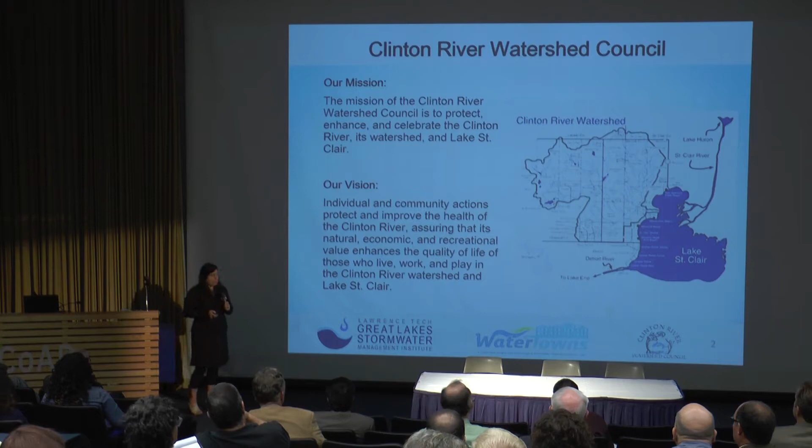So Water Towns is based on the idea that we have all of these assets in the Clinton River watershed and the Lake St. Clair watershed that are really being underutilized. Historically, we've not developed our water resources to the potential that exists for community and economic development. Some of that has been due to environmental degradation, and some has just been due to poor land use planning and poor community development choices.

But we see a huge opportunity for developing areas along our waterways where people can actually engage with them—go to the water, enjoy what's there, and have that be a part of your quality of life. So what we've done is initiated this program called Water Towns, which is really targeting the towns, the actual places within our watershed, to try to find out what's unique and valuable about each of these places.

We work with those local communities, whether it's civic groups, local DDAs, or the cities themselves, strategizing how we can look at specific areas in your community that are underutilized and could be more of a community asset than they currently are, and by that token raise awareness and make sure people are on board for all of these other more serious environmental considerations we've been talking about today.

So this is just a map that shows what we're calling our water hubs, and these are the areas that we focus our actions on. We've identified a really long laundry list of areas along the river, all the way up from the northern part of Independence Township, through Oakland County, out into Macomb County, and even into Lake St. Clair.

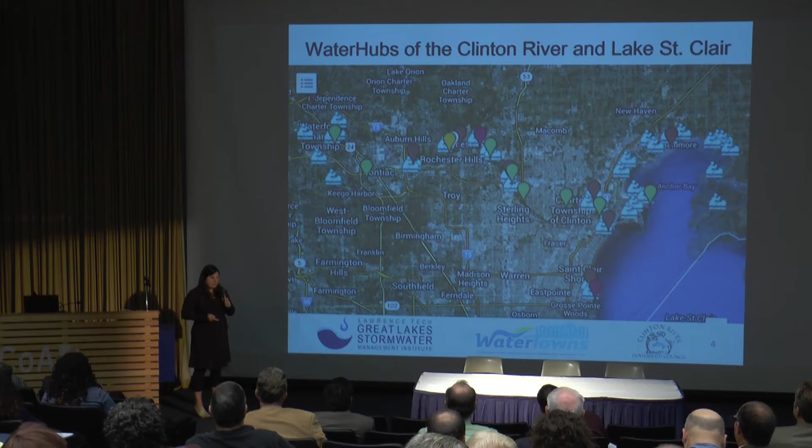So these are areas where we really think that there's a lot of potential, and we're all about trying to realize that potential and make that happen. So one of the ways that we're doing that is by working with Don Carpenter and Rachel Pleshak, who have been great to work with.

What we did originally was we went to some of these communities and did broader visioning around the waterways, identifying concept plans for what's possible, what could be implemented in the short term, and what could be implemented in the long term. In a lot of these areas, improving our green infrastructure came up again and again. So with the help of the URB funding, we were able to work with Don Carpenter and Rachel to take that a step further in some of these communities and come up with really detailed concept plans and cost estimates that can hopefully help move us forward, so that when grant opportunities and other funding come up, we're ready to go and know what we want to do.

The goals of our project are these conceptual site plans showing the specific green infrastructure practices applied to some of these areas, which you'll see in much more detail later in the presentation. Some really artistic renderings kind of get people excited and help them visualize, because when you start talking about bioswales and rain gardens, people don't necessarily know what that means, and if they do, they may have trouble visualizing how it fits into the context of the specific area. So this really helps people understand, in areas they're familiar with, what this stuff looks like and how it could benefit the community.

The stormwater volume reduction estimates are important from the perspective of showing the environmental benefit. It's not something that's necessarily easy to understand for local officials, but if we can quantify that and show the value, and hopefully equate that into economic benefits, we think there's a value there.

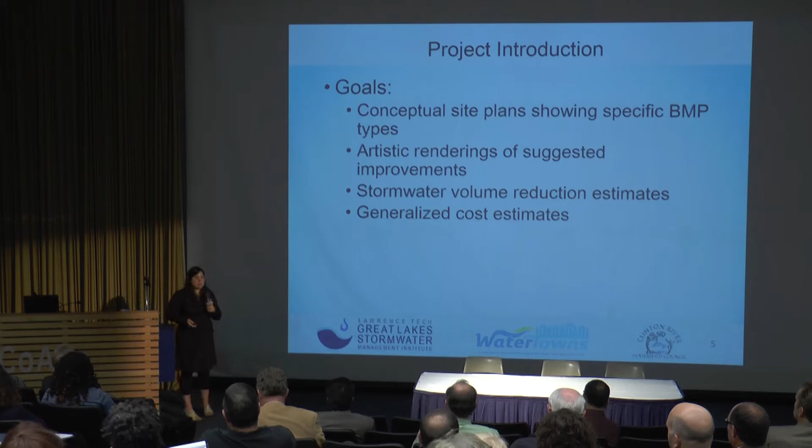So the three communities that we're working with, and we're hoping to continue this and work with more, are Clarkston and Rochester, both in Oakland County, and Clinton Township. We're working with these communities on a variety of initiatives to try to advance this water towns idea. But these are some really unique communities with some really different challenges. Clinton Township being much more suburban, downtown Rochester and downtown Clarkston having much more of an urban feel, so there's different issues that we're dealing with. So we're really excited about the project.

I'm so excited about the products that we've seen thus far, and I know the community leaders we've been working with are also very excited. Township engineers, city managers, they're going to be able to use this information to actually make these things happen and get these things built on the ground.

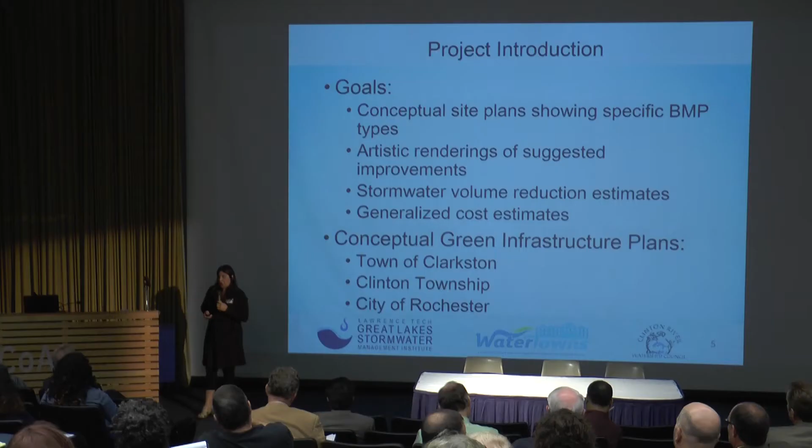One of the best parts about being a faculty member is you get to stand up here and take credit for the hard work of your students, right? Unfortunately, I have a little bit too much ethics for that. So what you're going to see is 90% Rachel's work, okay? So this is a lot of this.

The question is, well, if it's Rachel's work, why am I up here at all? So I gave Rachel the opportunity. I said, hey Rachel, why don't you present your work? And she said, I don't think I really want to do that. So what we're going to do is shoot for next year. Next year, the goal is to have Rachel standing up here talking about Rachel's work.

To go into a little bit more detail, what we did was put together a process for addressing these goals. We started by visiting with each community, talking with them, trying to understand their vision, what they wanted to accomplish, where they were.

We downloaded existing or retrieved existing GIS databases, infrastructure, what kind of pipe networks they already had in place. We came up with conceptual site plans and preliminary stormwater estimates, went back to the community and said, here's what we're thinking, what do you think?

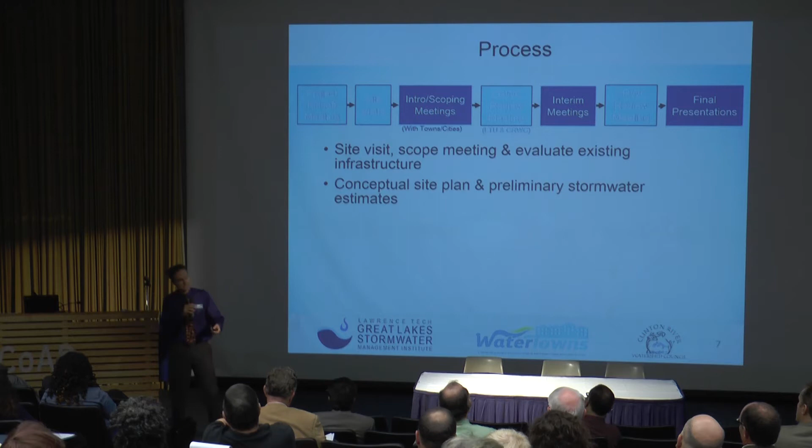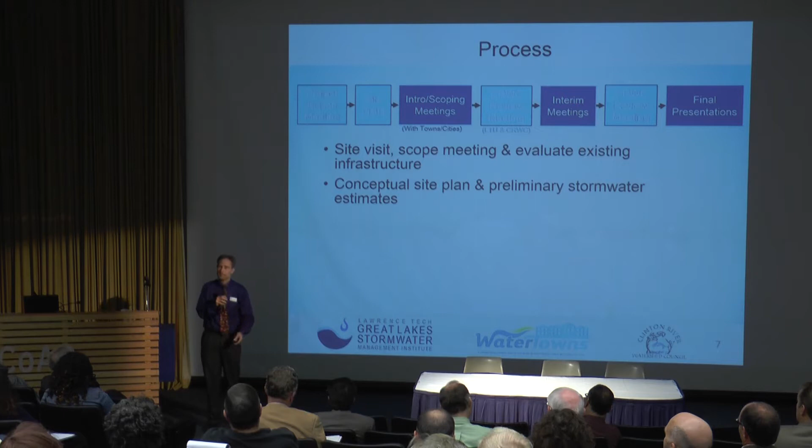That led us to eliminate some things. They said, well, that's okay, but we really want to preserve that for flag football, so let's take that out. Or, well, you know, that gentleman doesn't really play nice with others, so we should probably leave his parking lot out of the plan. So it was that back and forth process.

That was the internal deliverable check. So finally, we have final site plans and stormwater calculations associated with this. The way we did the stormwater calculations is with the SCS curve number method. I'm not going to bore you with all the details, but there was a process for looking at volumetric runoff from low impact development using an industry standard.

The cost estimations, Nina mentioned that briefly. What we did is we started using WERF, the Water Environment Research Foundation. They have an LID whole life cycle cost models tool that we used for these cost estimates. The thing that's great about that tool, for those of you who aren't familiar with it, is you can start off by putting in just industry standards. And as you refine your ideas, it allows you to start substituting out.

So once you know you're going to use raised beds in your community gardens, you can start figuring out exact costs and things of that nature. We also used the Michigan LID manual and RS Means, and then a few local sources in terms of some of the cost estimates. When you see the numbers on the cost, I do want to point out two other things.

One is we assumed 100% external contractor installations, meaning that if a municipality had some people in their grounds crew that could do some of this stuff, or volunteer organizations, that cost would come down. The other thing we did is we assumed everything on the high end, high end for all these suppliers, high end for everything. That way what you're seeing is an overestimate of the cost based on best factors.

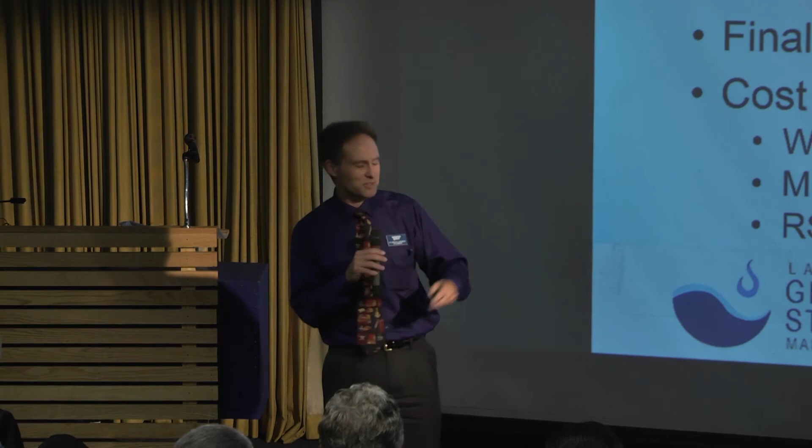We figured we'd rather shoot high than, well anyway. Basically, we figured we'd shoot high, and that way they'll be pleasantly surprised when it comes time for reality, right? So we're being honest about that as well.

So one of the things we talked about is, well, how do you convey this to people? One of the things we did is we looked at a 2-year, 24-hour storm. I know that's not a flood event, but that's the typical event you're looking at for green infrastructure. So we said, let's focus on that water quality event, let's see what we can do to capture the typical storm that happens once every 2 years.

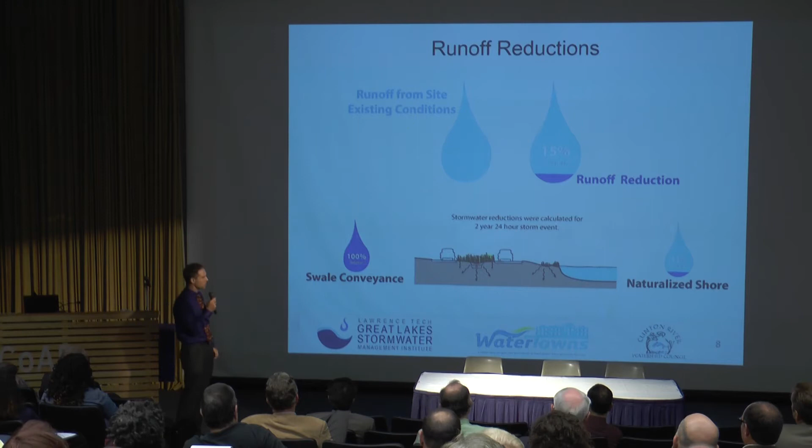You'll see this over and over again. This represents existing runoff, what's there right now. After we do GI, this would represent the reduction. So a 15% reduction would be like that. If you see a big purple dot like that, that's 100% reduction of runoff on the 2-year, 24-hour storm. We need to start with the baseline. Naturalized shoreline would be like 15%. So you're going to see that symbol over and over again.

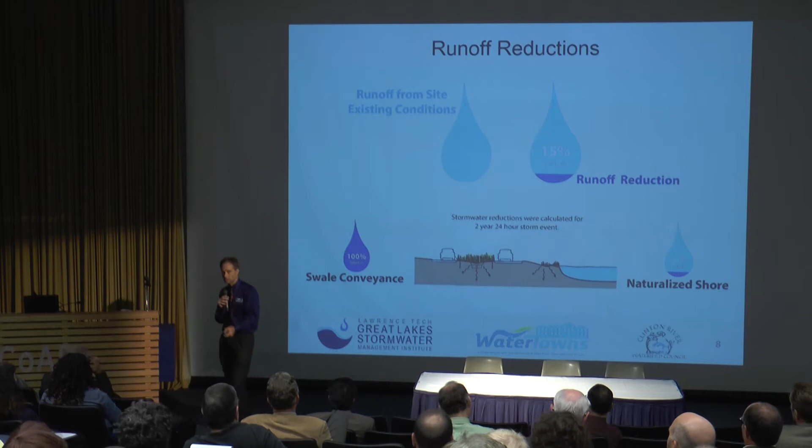So I'm going to start walking through this a little faster, but I wanted you to understand where these numbers come from as you're trying to digest the images. So let's start with the Village of Clarkston.

So here we are in beautiful downtown Clarkston. Okay, so here's our site. This is all downtown Clarkston right here. We faded out where we weren't looking.

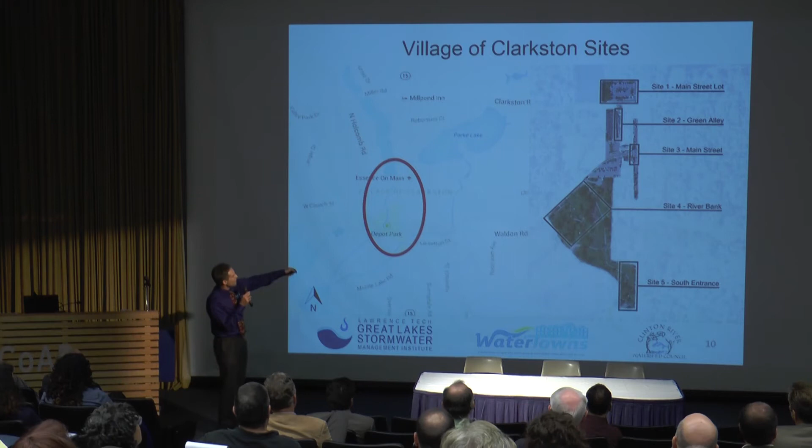We have basically 5 sites going through right downtown Clarkston. Here's Main Street — Kid Rock's favorite restaurant's right about there, so anyone who watches Diners, Drive-Ins, and Dives has been there. We looked at a series of sites stringing through the downtown, up and down Main Street.

I'm not going to go through every slide in as much detail as this one, but I want to show you what you're trying to look at, what you're trying to orient your eye to. So the way this parking lot is paved right now, this is a stall, and this is a stall. Nobody can park here. You have a corner of asphalt that's obviously not draining properly, that doesn't get used by anyone for anything.

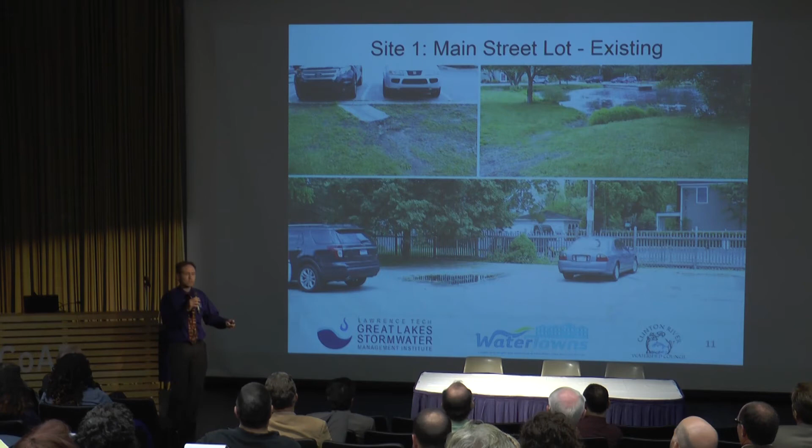Perfect opportunity for green infrastructure. So Nina and Rachel and myself basically walked the streets and tried to identify places with low-hanging fruit retrofits. If I offend anyone from any of these municipalities along the way, I apologize, but sometimes it just takes a fresh set of eyes to look at something.

They are mowing to the lake. Clarkston DPW right now — their tires from their tractors are literally getting into the mill pond. So maybe we need to educate on how not to mow all the way to the edge of the water line, right? You can see there's obviously erosion because you have too much water coming off of that.

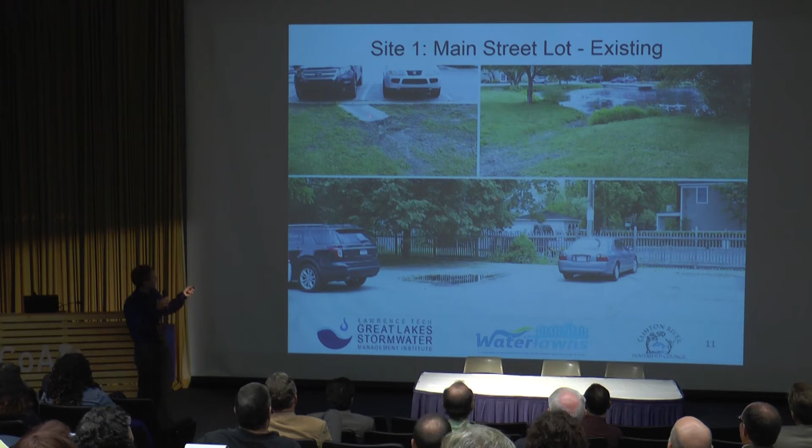So what did we do with this one right here? Well, we recommend a buffer zone — a riparian buffer zone, a lot of green space. You don't see it from this particular angle, but we also included a place for people to access the water. There's still a park bench there, still a place where people can access the water, but we're not mowing the entire edge of the mill pond. Here's our little rain garden in there.

Bioswale curb cuts, things of that nature. And so every single site, you're going to see a 50% reduction in runoff. So that one little corner that's being used by no one for nothing can give you a 50% reduction in runoff from that parking lot.

And that $5,000 estimate, again, that's a really high estimate — that's based on external contractors removing concrete, removing asphalt. I'd say it's going to come in a lot less than that, but we want to make sure we're setting the stage with this information.

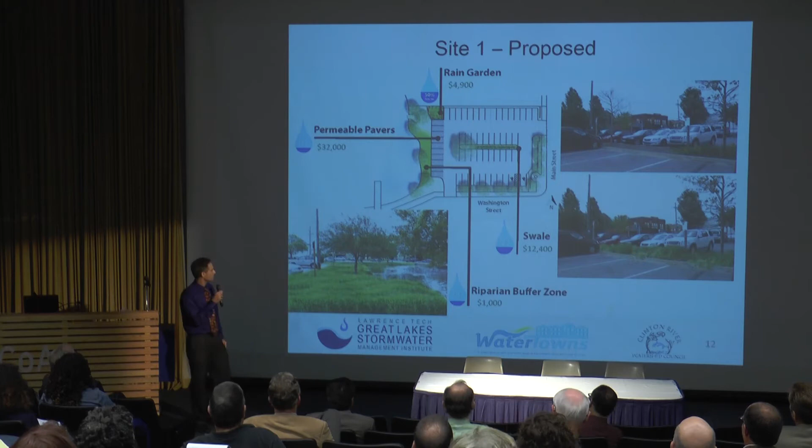Okay, so this is the green alley, I'm going to call it the green alley. This alleyway goes from the parking lot north of Clarkston straight down to the City Hall area and also Depot Park. It actually gets a surprising amount of pedestrian traffic despite it not looking very appealing.

You also have direct-connect storm sewers — the storm sewers off all these buildings direct connect right into the river. So what we looked at doing was modifying that: putting in permeable pavers, putting in planter boxes along the entryways of all the buildings, using different paver types. One of the things we're looking at here is, okay, you still have to have access for the trucks, but we're intentionally segregating off a piece of the walkway for that visual sightline.

This is where the pedestrians go — you're not going to get run over by the delivery trucks, you're going to focus yourself in this area right here. This gives a 100% reduction on the 2-year 24-hour storm, and a significant reduction even on the 10-year storm and the larger storms that are causing flooding.

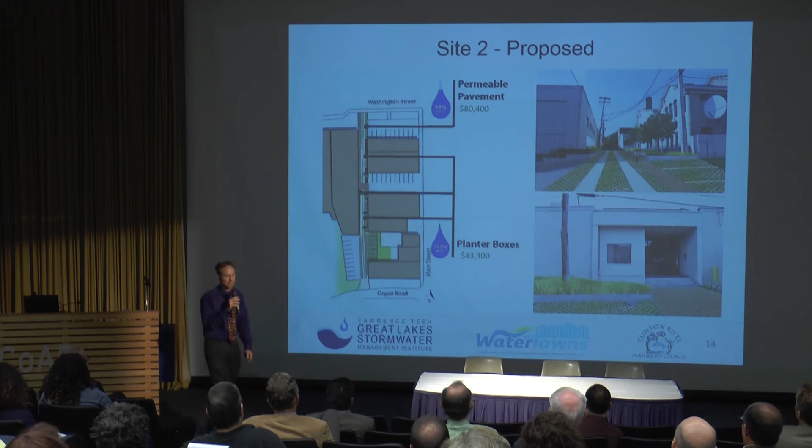One of the things we need to do is reach out to the transportation authorities and say, when a road commission or MDOT is going to redo a road, let's look for opportunities to put in bump outs, traffic calming devices, beautification devices that also serve a significant stormwater improvement function.

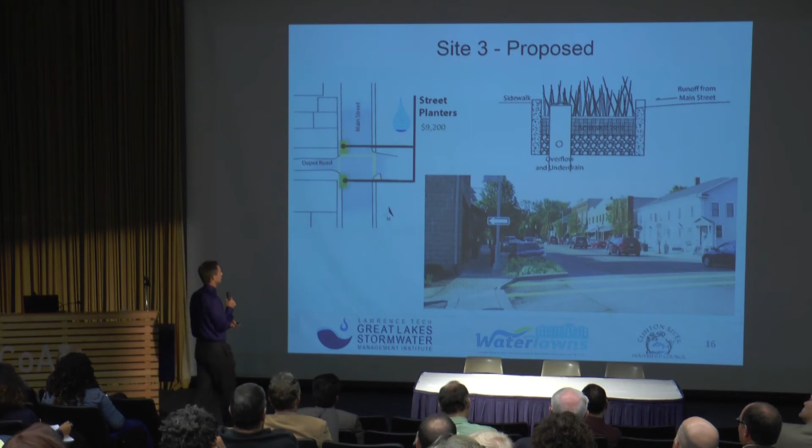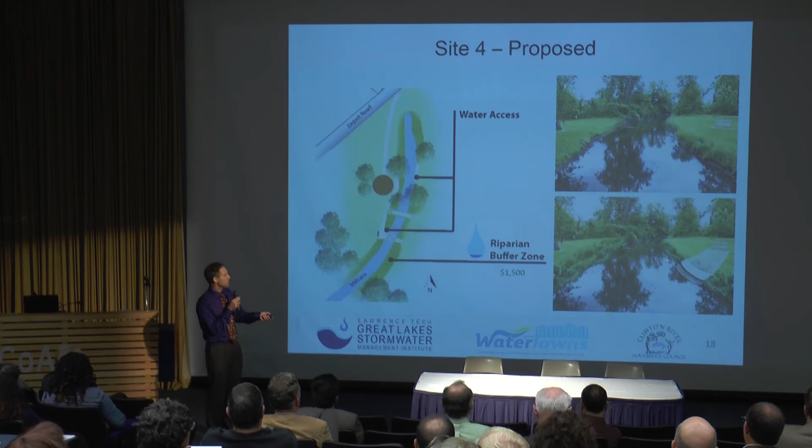What we're talking about is we don't want to cut off pedestrian access to the water. We want students to interact with it and get wet, but we want to focus that in certain locations. If we set aside some rapids with nice flat stones for students to walk across, we can concentrate water access, control erosion, and let other parts be riparian buffer zones. We set aside some areas to green up and clean water quality, and focus attention on other areas. A great example of that is this.

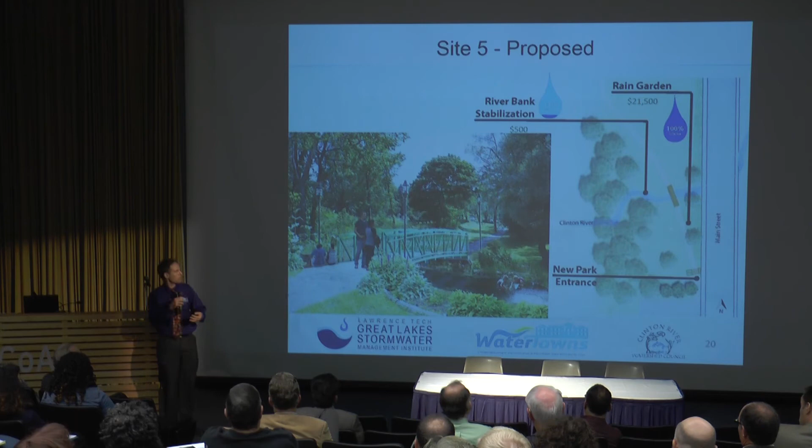In sum, for these 5 sites, there's a lot of impervious area, a lot of downtown area, but we're still looking at about a 50% reduction.

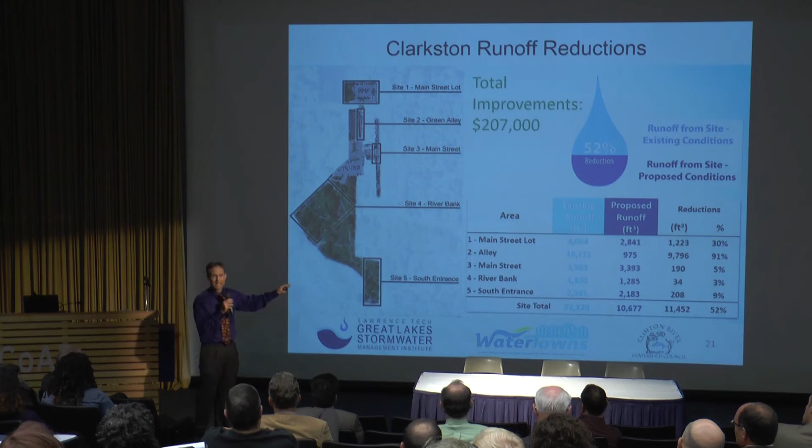Clinton Township has a beautiful fishing pond right there. What we're looking at is naturalizing the shoreline. They've got a beautiful arboretum coming across here, and we're looking at extending this naturalized grove. But basically, Clinton Township has a tremendous amount of mowed turf grass, a huge amount, so we're looking at what we can do to soften up some of those areas.

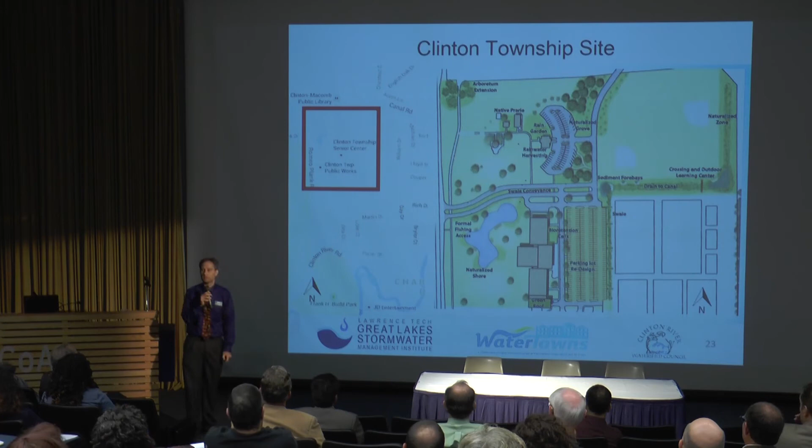One last thing, this is the large roof right here. We actually only put a green roof on this one because the rest of the roofs have more recently been retrofitted and aren't ready to be redone yet. So we recommended putting a green roof on the roof that does need to be redone sooner, rather than just going crazy and putting green roofs on everything.

For turf grass conversions, you can see here they've got this wonderful little village out there. Behind the village is where they do flag football, and in front they have concerts and set up lunch trucks. There's a lot of public interaction and use, so we have to always take into consideration how the public will use this. But there are areas where you could put in native prairies that might even enhance the user's experience.

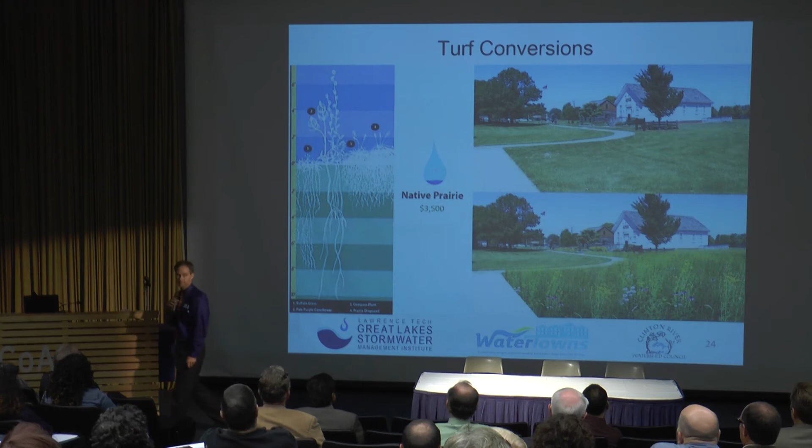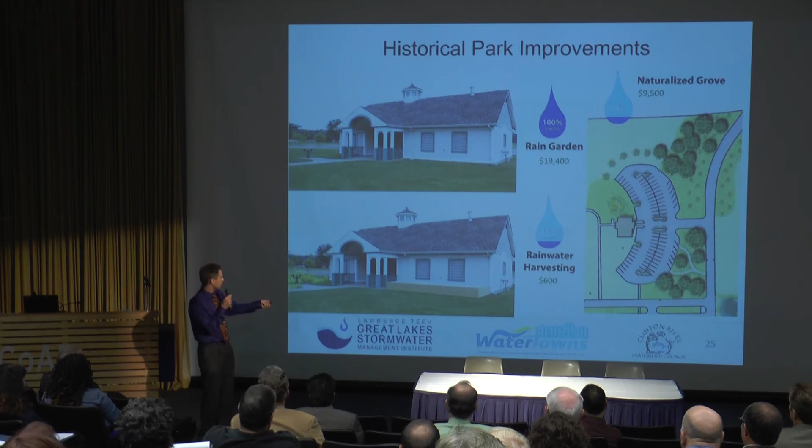For example, this area right here, just off to the right, is where they put up all their farmers markets and festival vendors. But the front of the building isn't being used for anything, and in fact it's really wet right here with really poor drainage. Go figure, it's Clinton Township, right? Flat clay, so very poor drainage. So what we looked at is putting a nice park bench in there that serves as a rainwater harvesting system. For $600, you're capturing quite a bit of water and providing people a place to sit.

Swale conveyance. They've got a very large area here that's about ready to be redone. One of the things I commend all of these communities for doing is being so open-minded. They want to be green, they want to have better places for their community and their people to live in. So they said, well, we know we need to redo this. Instead of redoing it the way it already is, give us an alternative. What can we do instead?

So we're looking at a really nice cut bioswale all the way through here, depressed in the center, good infiltration in the middle, complete capture of the 2-year 24-hour storm, and most capture of the 10-year 24-hour storm. It's basically proven technology. It's pretty high sticker price, but you've got to remember that's also redoing a lot of the road there, curb cuts, underground overflow. There's a lot of engineering that goes into that number.

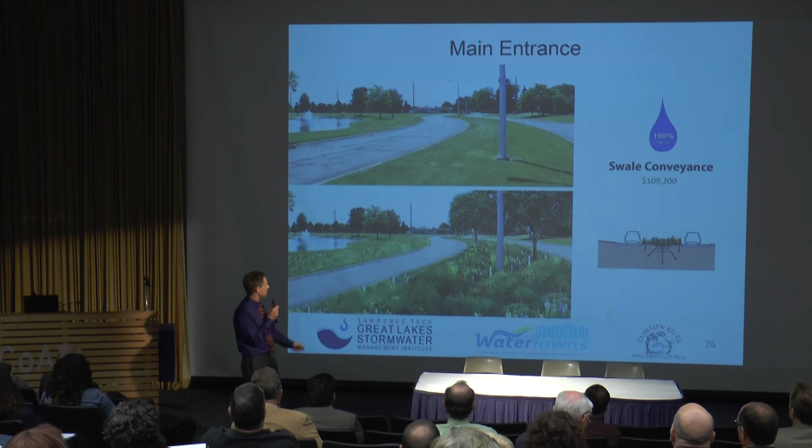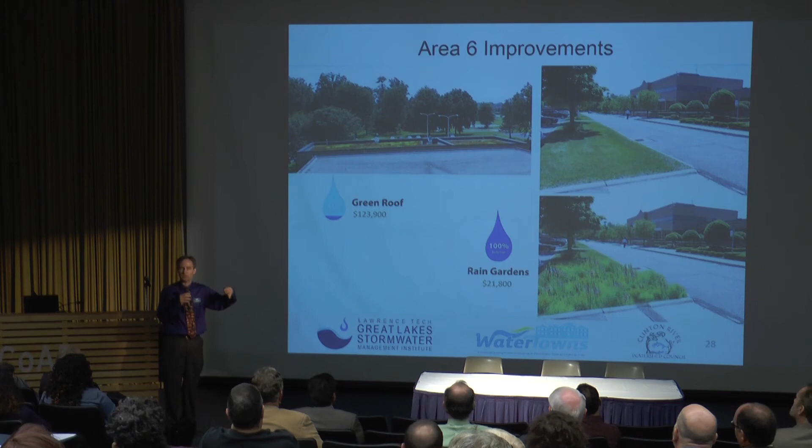So a few others, green roof. When that says a 15% reduction, that's why I brought that up. It's 100% reduction on that roof, but 15% on the entire building, because that portion of the roof is only 15% of all the roof. So it's actually 100% of this part of the roof, 15% of the entire building.

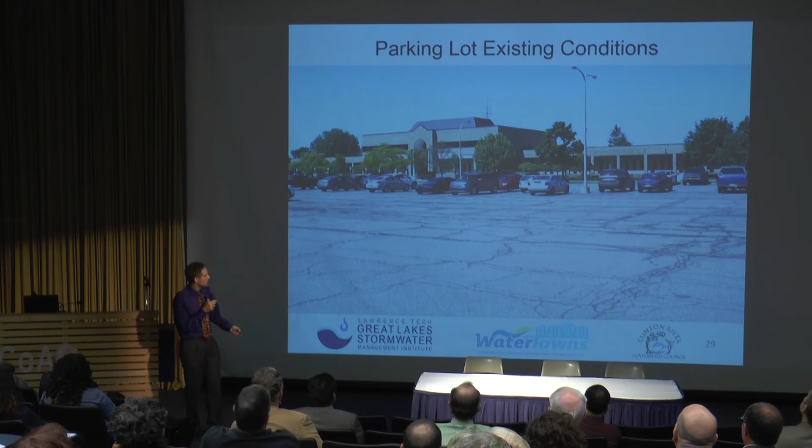Existing parking lot. This has been repaved a couple times, but obviously it's ready to go. So what we said is, let's look at traffic flow patterns. How are people using it? And so we recommended a couple different things to them about restructuring their flow patterns, reducing some of their width.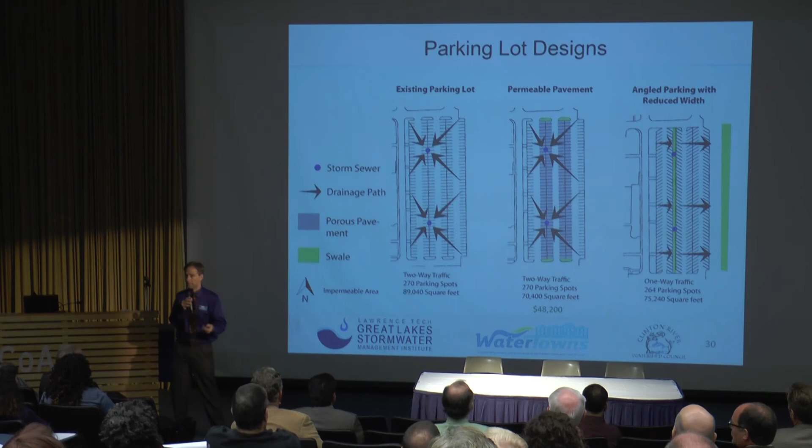Swale improvements along the way. The thing that's interesting about swales is a lot of what we hear about maintenance is, man, those things are a pain in the butt to mow. Maybe we should just stop mowing them.

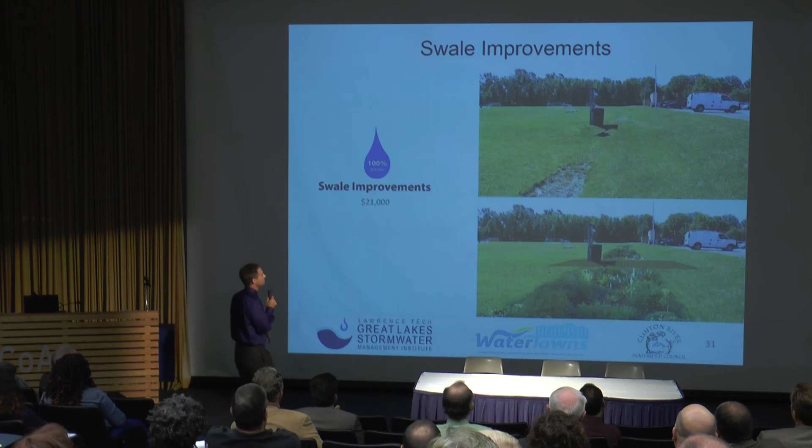So here's about a 32% reduction. One of the reasons that number is a little bit lower is it's a very, very large area. We concentrate our improvements in several key locations, and that number is pretty large a lot because of that, A, the green roof, and B, that entryway.

As Nina mentioned, the thing about this is they get to have all this broken down so they can prioritize. They can go through and say, okay, when we're ready to do a $100,000, $150,000 parking lot, let's look at this instead of this.

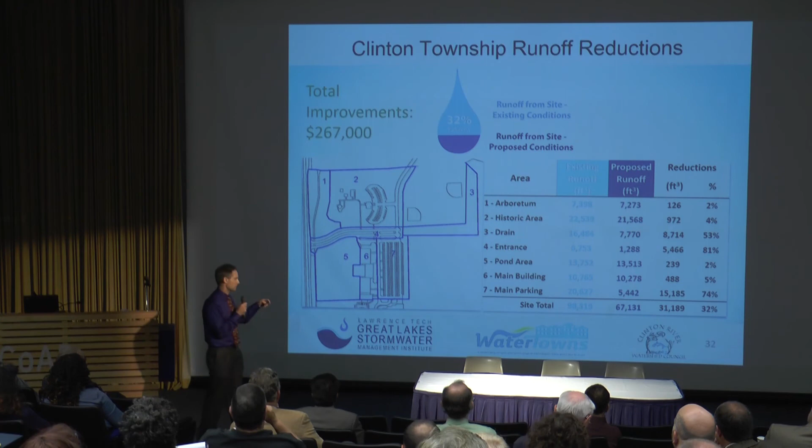City of Rochester has already had a lot of green work done to it. This is the Clinton River right here, and that's the kayak launch there. Many of you are familiar with this.

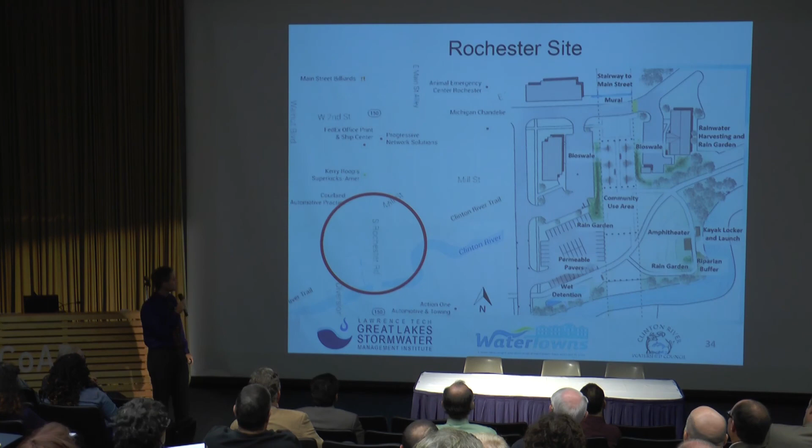So what we're looking at is Rochester Road and the area underneath of Rochester Road, which is an MDOT road as well. We looked at, okay, how can we use that area? This is a building nearby that is going to potentially be retrofit and rehabilitated into another use. So we can put in rain gardens, rainwater harvesting systems, beautification.

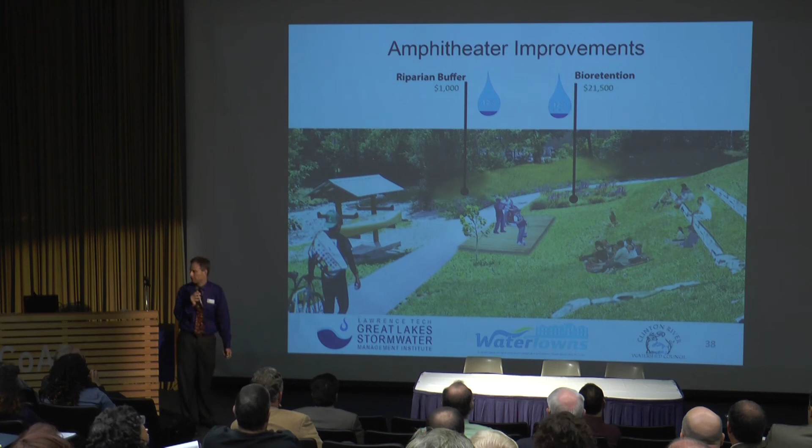So here's the existing amphitheater. I don't know if they call it an amphitheater, but we call it an amphitheater at this point. So let's make it an amphitheater, let's actually get the people engaged, bring in the flagstone.

And then bioretention. Right now what's happening, I'll go back one, is water is just roaring down this pathway and eroding out this part right here. So what we're looking at doing is, can we divert that water off this pathway into some bioretention cells, put in some paving, put in some riparian buffers there, and kind of slow it down.

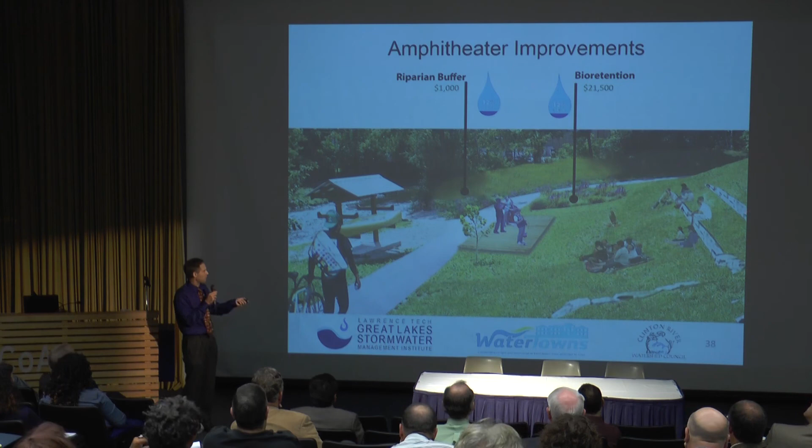So they wanted to provide access to the river, which is exactly what they got, and it's exactly what we need. But one of the unfortunate consequences is you've basically paved an area for the water to go through, causing a lot of erosion. So we're just looking at retrofitting that. Here's underneath the bridge - right now it's kind of an ugly area.

And I apologize if anyone looks at this and thinks it's beautiful, but I'm going to go with ugly. So we have the, sorry.

So what you see here, all this erosion is because water is coming off the bridge deck above, falling straight down and hitting the ground, carrying all of that polluted runoff from the road and fine suspended sediments, clogging up the drainage system downstream.

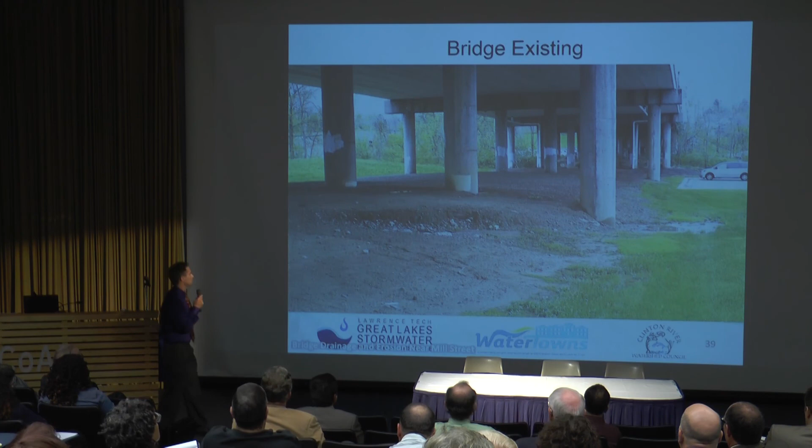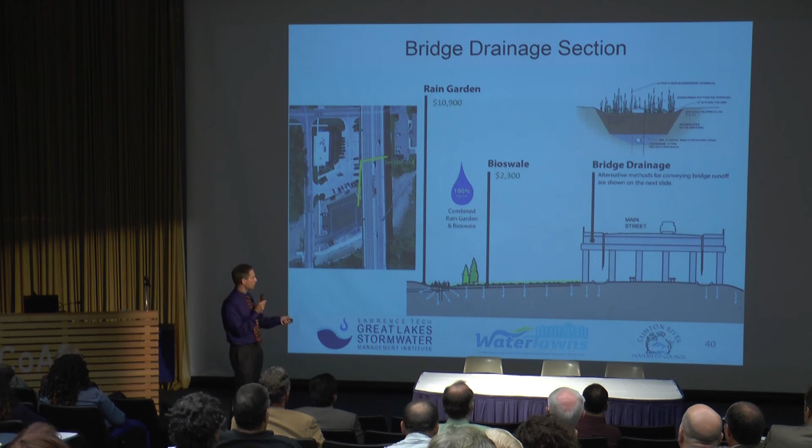So what we looked at doing is bioswales, rain gardens, rain chains. I'm going to show you a little bit about that, but how can we slow that water down and get it to infiltrate as best as possible?

And so what we're looking at here is these are rain chains. So instead of that water cascading 30 or 40 feet, having it run down a series of rain chains, slow that water down, have it fall into basically an intentional rock pool. You're going to get a little bit of a rapids kind of look there.

And then having that flow into a native bioswale. We've been told that MDOT's not going to let us do this, but we can envision it even if they don't let us do it. So what we might have to do, well, this is actually an artistic rendering. That's not actually there right now.

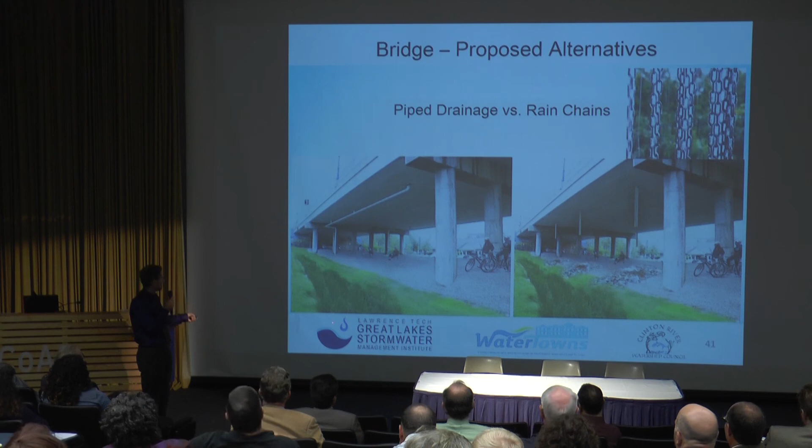Right now these fall straight down. We're going to look at piping it over and then piping it into the swale, so we get that additional storage out of it anyway.

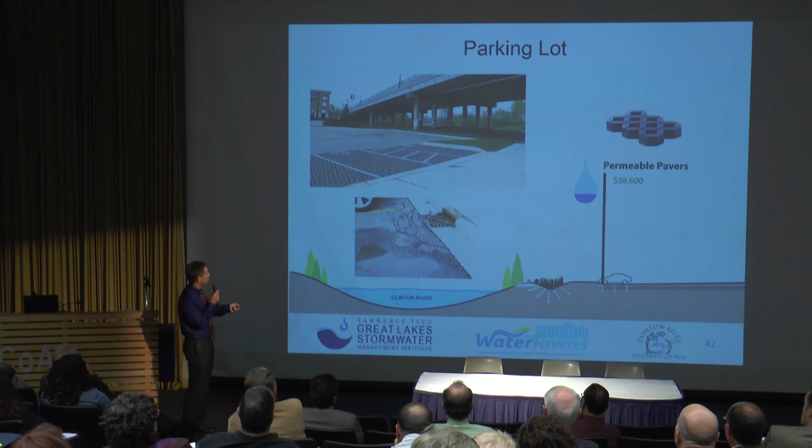So, pervious pavement for this parking lot. This parking lot's actually brand new, but it's already seen a lot of problems because of the additional runoff coming down through here. So maybe we can just get rid of one row of parking and put in some permeable pavers there. And then the area below the bridge, right?

So part of this is placemaking. The idea behind WaterTowns is placemaking. It's about giving people ways to interact with their water, and then it's about us figuring out better ways to improve water quality for the Great Lakes as a whole.

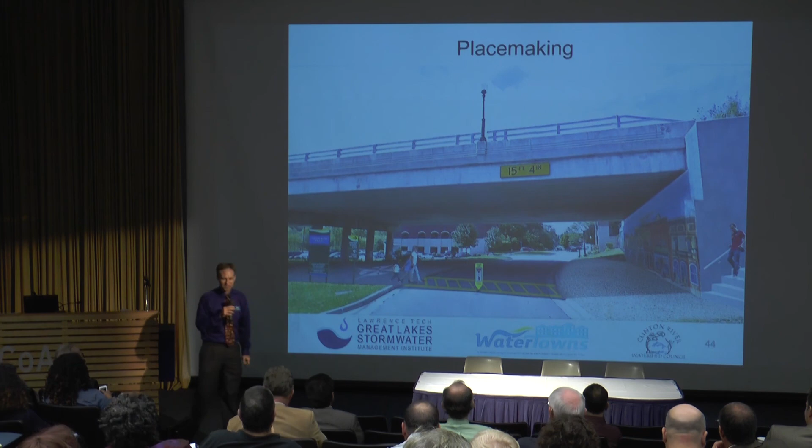Okay, other than, you know what I did? I said, you know what, that concrete wall could probably use a painting on it. That was my contribution. And then Rachel made it look like a painting.

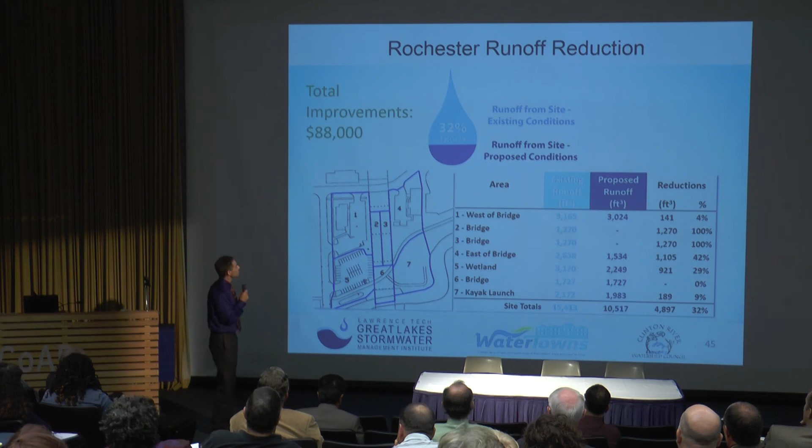All right, so what's next? Okay, it's noon, which means what's next is lunch.

But what's next for this project, we have a final report we're going to deliver to the Clinton River Watershed Council. We are making presentations to all three of these communities in November at evening meetings, city council meetings, so they can see the vision, see what we came up with.

Then we're going to be providing all of this electronically, including the cost spreadsheets, so their engineers, their DPW, their people can start filling in numbers more appropriate for their specific situation. We'll explain what we did and allow them to take the next step forward, which also means the Clinton River Watershed Council can work with these communities for implementing the vision when funding opportunities come about, or when infrastructure has to be replaced anyway, which is what's happening in Clinton Township.

So with that, if you have any quick questions, I'll gladly take them. I know you really want to get to lunch.

Yeah, Don, or maybe it's not yours, but the representation of the volume reductions, it's a nice visual display. I think that makes it pretty clear for folks. Are you doing anything similar for the water quality improvements that these are providing?

Nope, for this one we stayed with water quantity. We're just trying to keep it pretty simple. I mean, we can make the allegory or tie to water quality, but we're not saying, hey, we've already heard about how do you convey to people this is how many pounds of phosphorus you're going to keep out. So we kept it pretty simple.

And actually, believe it or not, I can take credit for the raindrop. Rachel drew it, but I just thought we had to do something to keep it simple so they can really easily understand.